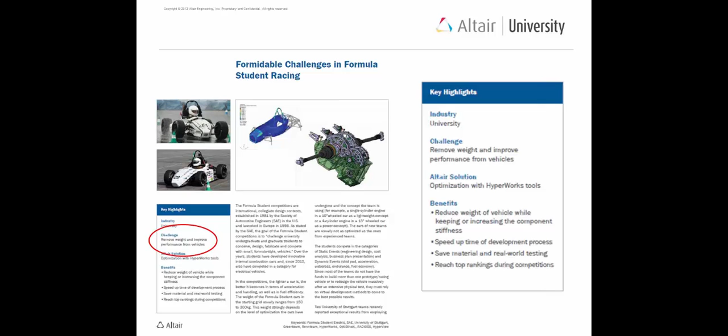Most of the teams we are talking to face certain weight issues, and we're going to show you later in this webinar solutions for how you can not only speed up your design process, but deliver at the very end a product which is more innovative and uses less material. So essentially we talk about topology optimization.

Another case study is from a solar team from the University of Michigan. I guess you're familiar with this team. It's also about using optimization with our finite element solver, OptiStruct, to minimize the weight of the composite structures. That's another topic which is, of course, very important.

Just thinking about the monocoque structures which are widely used in Formula Student race cars. So to give you an idea, I'd like to challenge you a little bit with this little, let's say, design project. It's rather simple, but it's very illustrative about the things we're going to show you later on.

And by the way, this is not a marketing webinar. We are really going to talk about technique and technology in here.

So just think about this little challenge over here. The yellow area is what we call the design space. That's the area where you can change the geometry. The task is to determine a solution which uses as little material as possible. At the tip over here, I hope you can see my pointer, there's a force applied in the vertical direction with the same magnitude upwards and downwards. You can apply certain constraints over here if you want to.

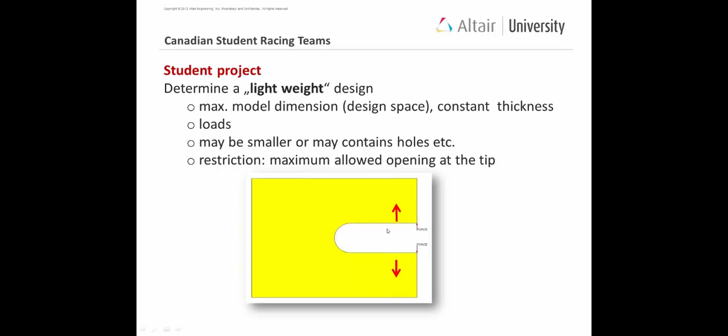If the results over here tell you no, displacements, for instance, are much too high, you need to go back and you have to restart over here, changing the CAD geometry. Most of the time, the overall shape of the geometry remains pretty much the same, but you tweak around a little bit over here and over there, and then actually hope that the next iterative process over here is more successful. The problem is simply that you need to question yourself, how efficient is this approach at all?

You don't know how many loops you need. Maybe if you're extremely lucky, you just need one run and you are done. But then the question still remains, can we do it any better? I mean, how good is your solution over here? Is your competitor, meaning the other team, maybe doing better, ending up with a more innovative solution? And there are, of course, as part of this process, a lot of uncertainties. How long will it take you really to get from here till the very end, to end with a product which you're going to use in your race car? And again, what about the quality and the performance of the component? Even though this is already, let's say, simulation driven in here, there are a lot of uncertainties.

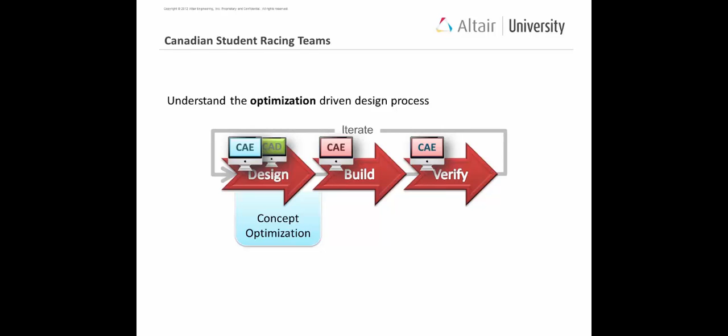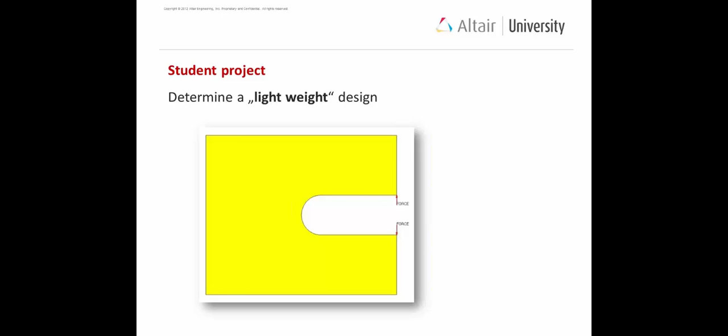As a kind of average number, most of the teams report weight savings in the order of 20%. Of course, it always depends how good the starting geometry, their old geometry was. But roughly 20%, sometimes 20% plus is the result. So this is the geometry we started with. And if you look now at the concept design solution, it would look like this, for instance.

What you can see over here is actually the geometry which was reinterpreted by students, and they put the whole thing into the finite element program, which is called OptiStruct. Of course, you can claim in here certain modeling mistakes, but this leads us to a different story. For instance, here, the meshing most likely is not really appropriate, just one element over the thickness. But this is, as I mentioned, a different story.

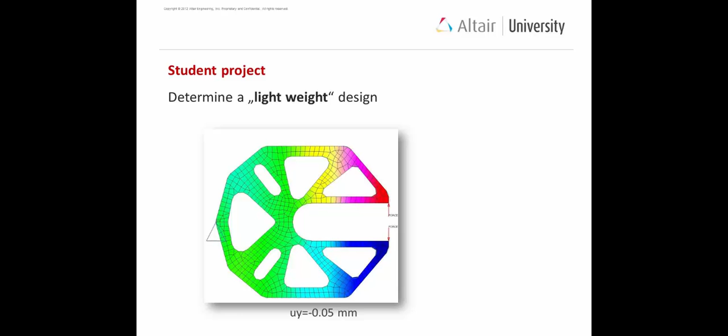The point simply is that starting with the yellow design area, ending over here with this geometry, which is really, let's say, lightweight, is something which typically takes one iteration, and you are almost done. So that's a pretty, let's say, efficient approach. And this again illustrates the same process.

You start with a rather, let's say, sketchy or bulky component or structure over here. You don't think about the details a lot at that point, because the details will be introduced by the optimization algorithm later on. That's what I mentioned with the bulky design space. You apply your loads, the materials, etc., and you go through this process. You may apply what is called shape controls. Shape controls simply means you want to have certain symmetries in your final design.

The optimization tool then pops out with this kind of concept design, which still needs certain refinement and interpretation, because sometimes the thickness of the ribs are, let's say, not continuous. Sometimes they get a little bit thinner, they taper out. Sometimes you don't like this kind of geometry. So there's still some open area for you to improve the geometry. But again, this way from the first slide down over here is typically done within a few iterations, much faster than the, let's say, traditional CAE process.

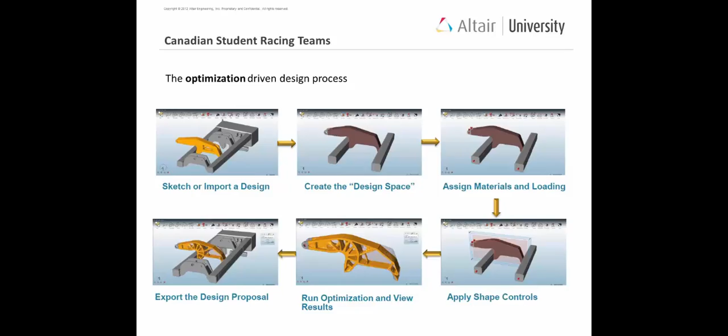And in fact, this slide brings me to Manuel Ramsaier. Manuel Ramsaier, I go back to our agenda. He is a former Formula Student member here in Germany, and he is now going to present you some of the work he did in the past. So, Manuel, I'm now making you presenter.

All right, I hope everyone can hear me. Yeah. And I hope everyone can see me now, or at least my screen. Not yet? No. Okay, now I see a screen.

Now, okay. So I'm happy to present you hands-on experience because I was, or I am still, a member of the Formula Student team, and I went through the process with Altair together, and I can share those experiences with you, which might be of worth for you. So first of all, who is this guy talking to you? I'm born 30th of July 1989, I graduated recently in August, got my master's degree, and I'm now working at the university as a doctoral candidate.

And my first contact with Altair was at a practical semester which I had done at Liebherr Aerospace, and at that point I did not know anything about the finite element method, and it was rather hard for me to go just from the start to evaluate the software for the company.

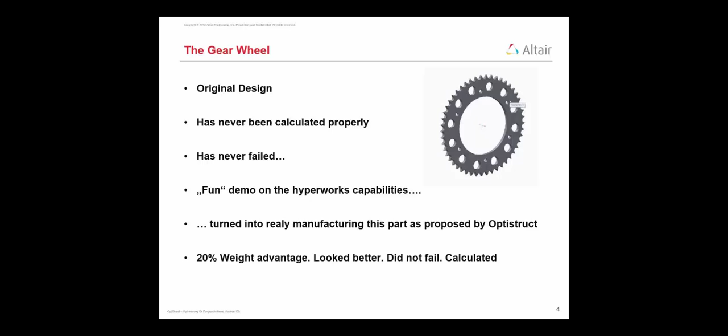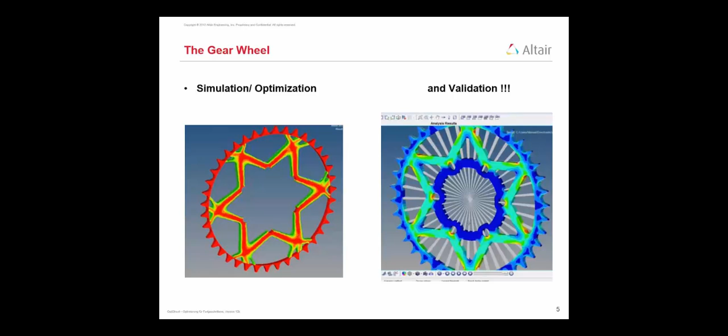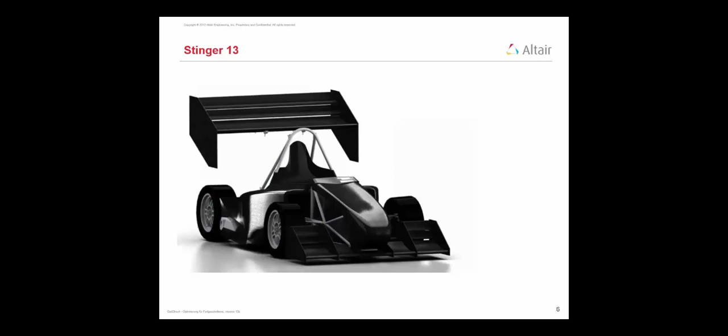Let's move on to the recommendations for studying. The support forum, which will be discussed later, is of great help. It is professional help for free, and I really can recommend it: if you have questions or a problem, go there, post your question, and you will get help rather fast. I experienced 24 hours at maximum.

And also I would recommend that you start to learn how to do simulations, if you're not already doing that, because it's a highly wanted qualification later in the industry. And another point is that you never ever trust your simulation blindly. Always double check, always make sure that the simulation is within reasonable limits. And for that point, the Altair ebooks are a help for beginners, as they describe the theory behind the finite element method very easily and straightforward.

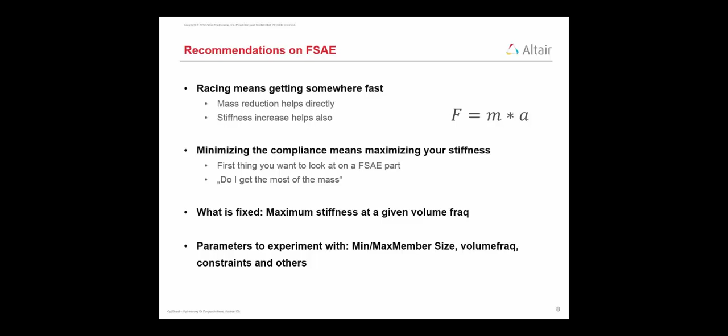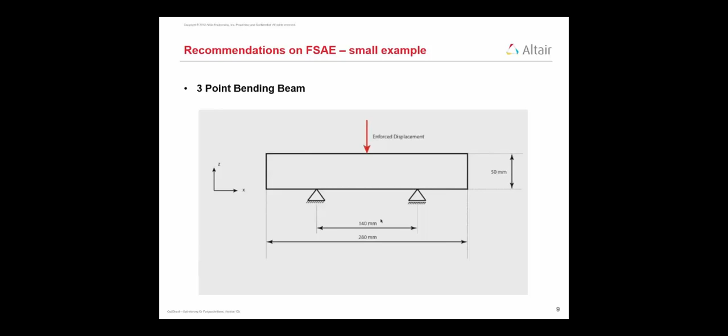As a small example, I want to present you the 3-point bending beam. It's really rather straightforward. You have two bearings, an enforced displacement, and a bending moment. First, you have to model it. So you have to decide whether you model it in 2 dimensions or 3 dimensions. You have to do the bearings. You have to give the load case. And then you're going to analyze it.

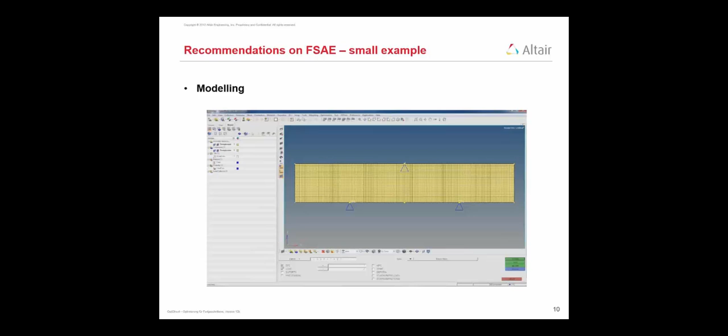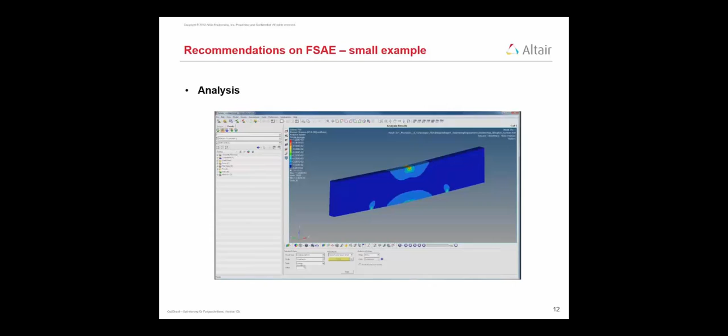In the analysis, you have the stresses, the displacements, and first check if your boundary conditions are set reasonably. When this is okay, you optimize it. And with that optimization, you get those structures we talked about earlier. From that, you go back to CAD and reanalyze it. That was in very short terms the thing you've got to do if you want to be the fastest car on the race circuit.

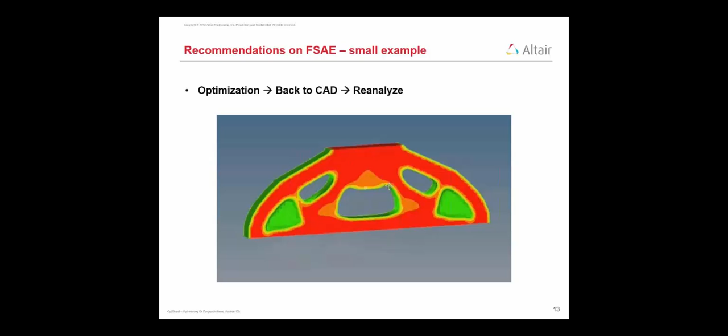So for that, I want to thank you for attending, and I picked a rather different quote: if everything seems under control, you're not going fast enough.

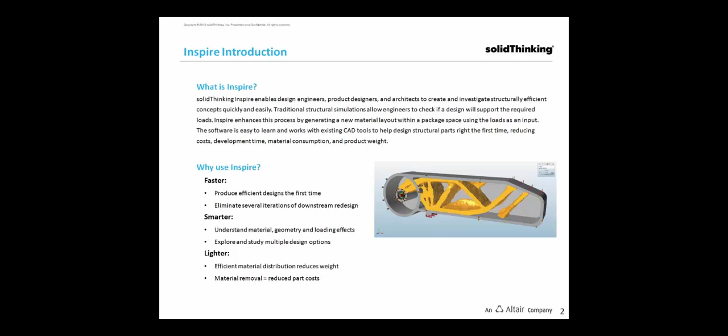The traditional design process will be to check if your design will support the required loads. But Inspire enhances this process. You give your loads as input, and then Inspire comes up with a design which is of low weight, but is still stiff enough to do what it's required to do. And I think we went over this quite a bit.

So the traditional process is you design, you build, and you validate. And this is a very expensive process, because if you have to redesign, your initial design goes to waste. And if you look at the design process we are suggesting, you start with an initial design, and then Inspire, the software, will come up with a low weight but still strong structure, and then you can redesign.

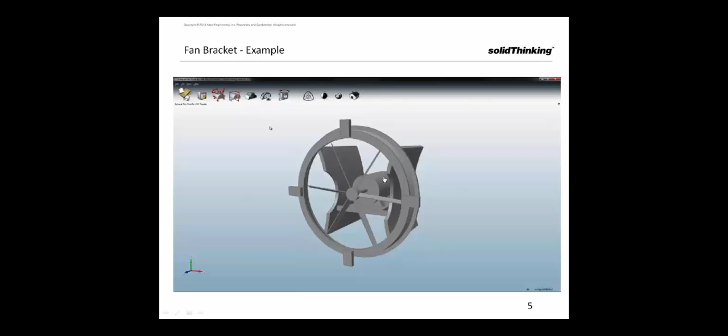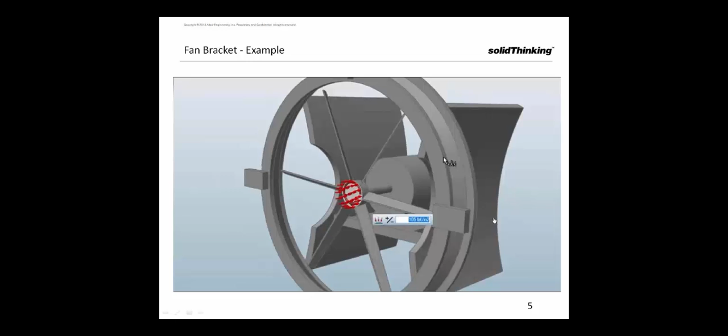So just to give you a quick idea of the design process. So with Inspire, here is a fan, and what you do is you apply the loads that the fan will experience in service, and you constrain the regions where the fan will be bolted. And then you choose the areas of the fan which you think can be redesigned and the mass can be reduced.

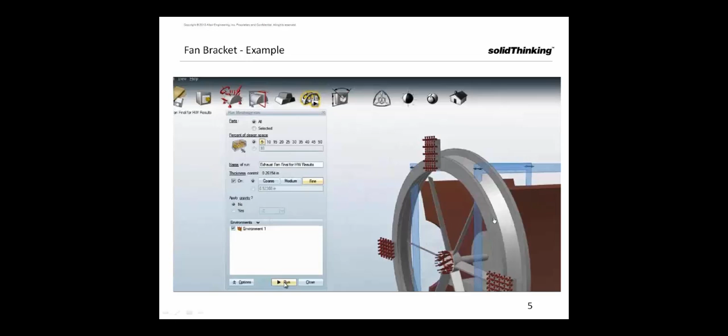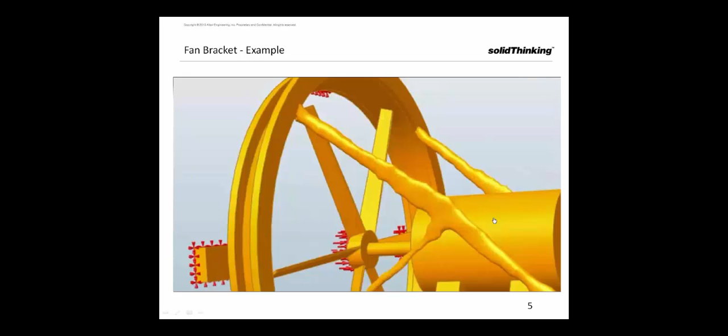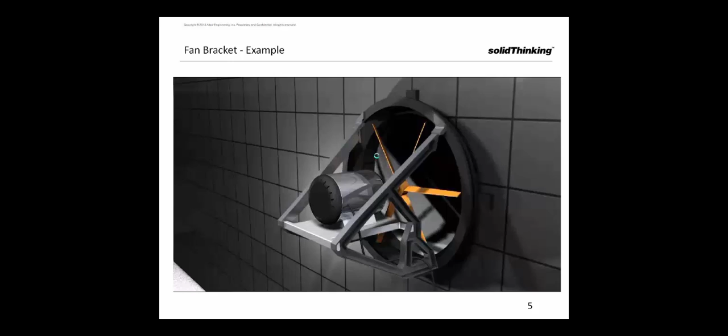And you just give such input to Inspire, and then Inspire will calculate and give you an idea of how the load is transferred within your design space, so that you can then redesign that particular component to just have the essential material within it, so that you end up with a low weight design like this. So I think I'll just go ahead and show you the tool right now.

So this is what solidThinking Inspire looks like, and as you know, initially we all start with geometry, or the tool has to know what your component looks like and its dimensions, etc. So Inspire allows you to do this in every way. You could create your CAD geometry in your CAD tool and import it into Inspire, and also you can create your geometry within Inspire.

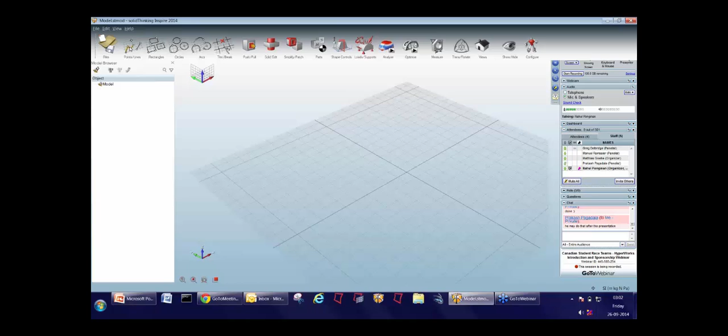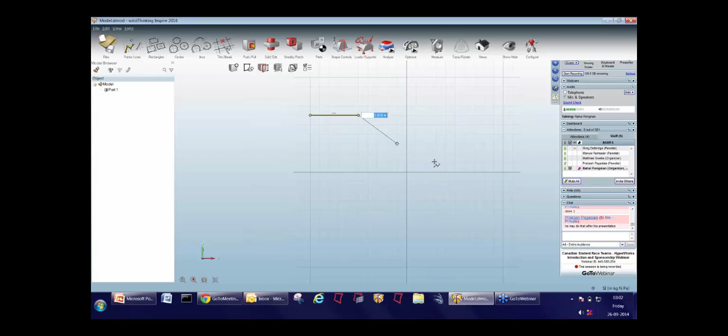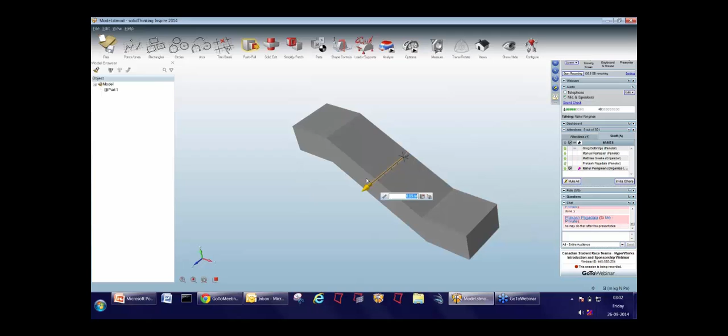So I'm just going to start by giving you a quick idea of how easy it is to create the geometry within Inspire. So we have these sketch tools here. I just click on a sketch option such as polyline here, and you immediately get a sketch plane, and you can just go ahead and sketch your geometry if you know what the cross section will look like, for example. And so it's that easy to create your 2D geometry, and you can immediately push or pull it, and you then have your solid geometry.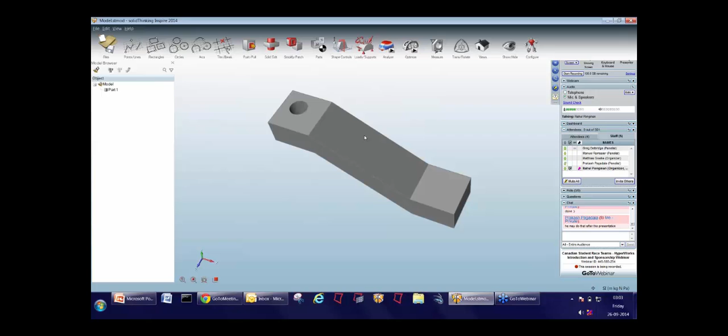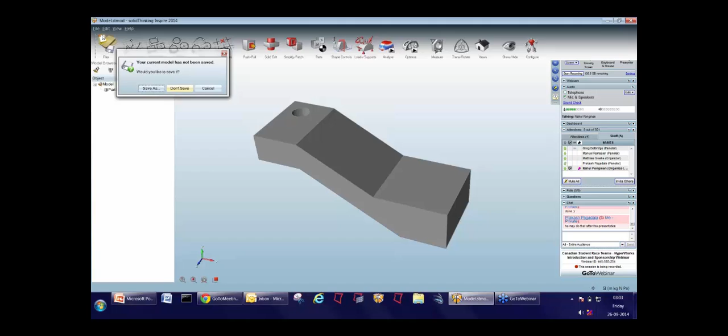So Inspire works only with solid geometry, and then it's quite easy to modify your geometry. For instance, if I need to put a hole in a region, I just do it that way, and I can modify it in any way I want, like this. So this is just to give you an idea that it is very easy to create the geometry of your component within Inspire.

But like I said, you can also import geometry from any CAD format. It supports every available CAD format, and I'm sure you recognize some of these formats here. And in this case, I've just saved it in the STMod format. This is the Inspire format. And just to give you a quick idea of how you can edit your geometry if you bring it in from CAD and do not actually create it within Inspire.

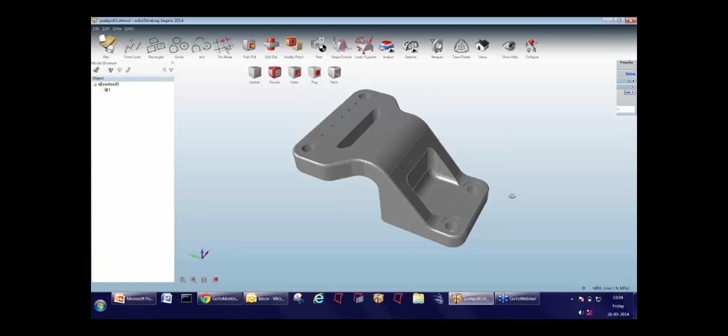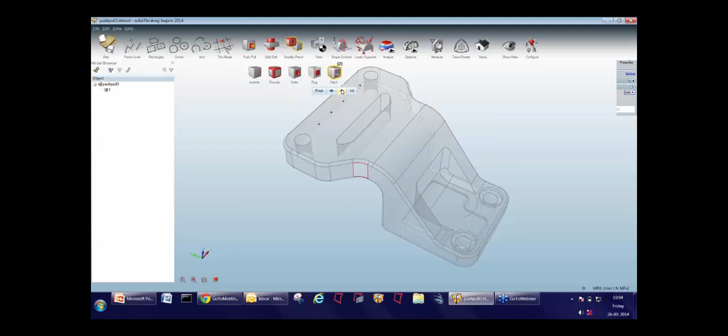So some of the problems with imported CAD geometry can be easily addressed with Inspire. For instance, I have surfaces missing, and I want to fix the surfaces so that this actually becomes a solid geometry. So I just go to the problem region that way, and I can fix it by just a left click. So Inspire will identify any of these problem places, and you can easily fix it up.

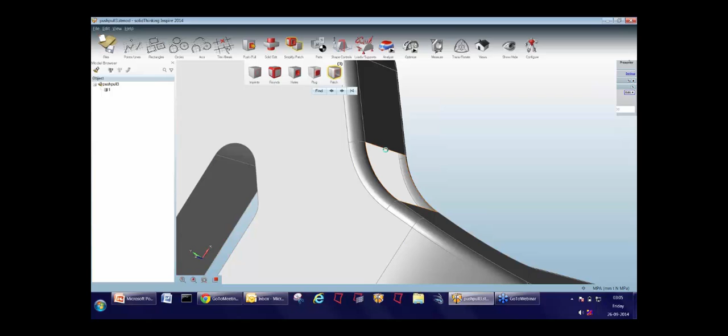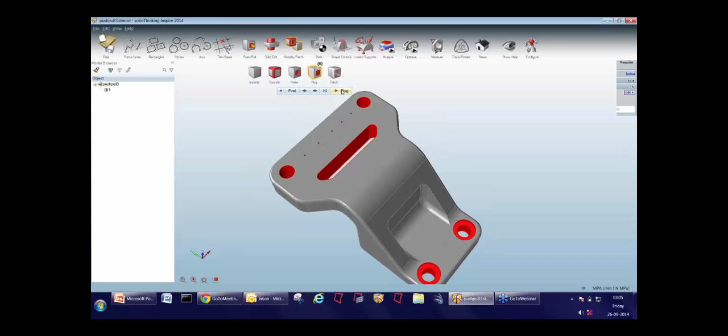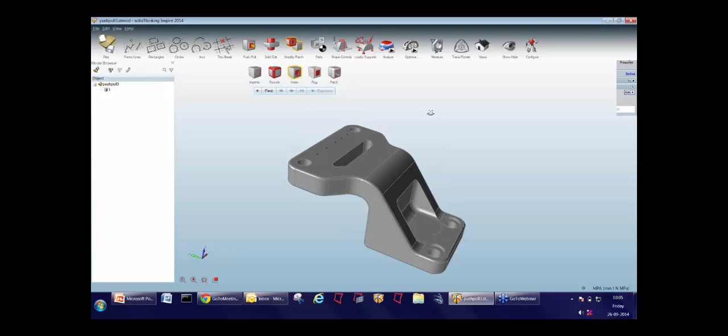And you have several options to modify your imported geometry. You can find all the holes or any empty spaces in your geometry and quickly fix it. And you can see that in this way you are actually creating different components, but you can also just fix the holes in your geometry as a part of the original component, and several other defeaturing methods like removing your fillets and so on.

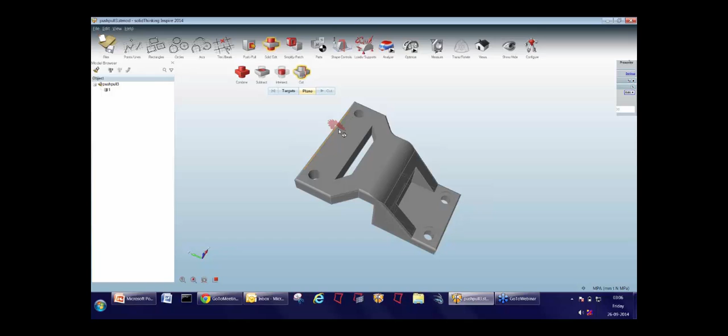So this is just a quick introduction into the several features. For instance, I can cut up my model like this and move it around. Just to give you an idea that it's very easy to modify your CAD geometry. So I would now move on to actual designing. So let's say your geometry is now ready.

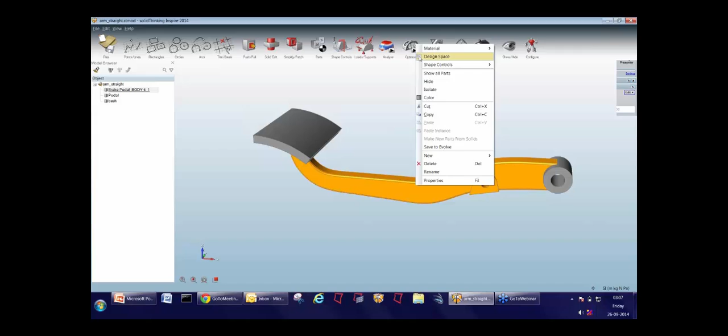So what you do with Inspire is initially you need to identify the region for Inspire that you think should be redesigned and where you need the mass to be reduced, for example. So you just right click on that particular part and you call it the design space. And you leave the rest as non-design space because this is the region where you would be applying your loads and constraints.

So this, as you can see, is a brake pedal, and this would be experiencing a load of about 500 newtons, let's say, and you can then constrain your part like this, and you're basically saying the part is held here and it doesn't move.

So what you do now is you can then enter your optimization parameters. So you can say I want to retain 50% of the mass of this component, and Inspire can remove half of the material away while it is maximizing stiffness.

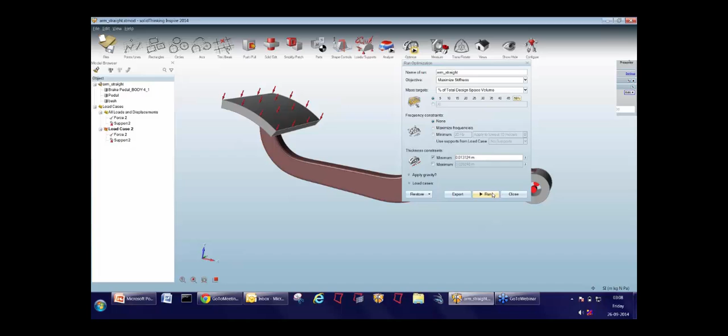And you have several other options which you might need when you're designing. For instance, if you want to take gravity loads into consideration, or if you want to impose frequency constraints, for example. But I'm just going to skip those, and I'm just going to run this optimization analysis, and all I wanted to do is remove 50% of the mass, or close to 50% of the mass, while keeping it still strong enough to do its job.

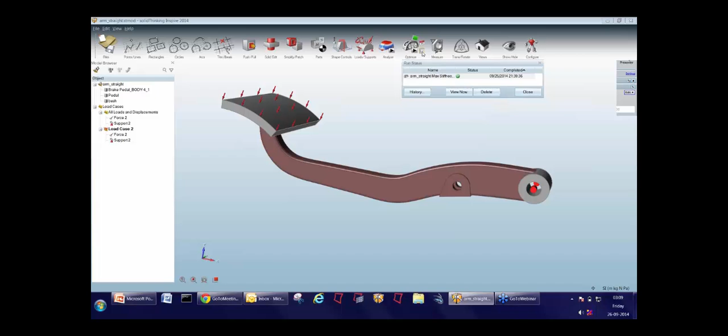So as you can see, I just clicked run, and hopefully we should have our results within a minute. If you're curious, you can just find out how far the optimization run has gone already. So once Inspire has calculated its result, it's basically telling us that we can remove mass in these areas, and therefore we have a lighter design which still does the job it's supposed to do.

What we would always like to do once we have a redesigned component is to check if this new design will actually perform as expected, and that's possible with Inspire. So I just click Analyze here, and then Inspire will basically do a linear static analysis, and this will then tell us if the design is going to perform as expected.

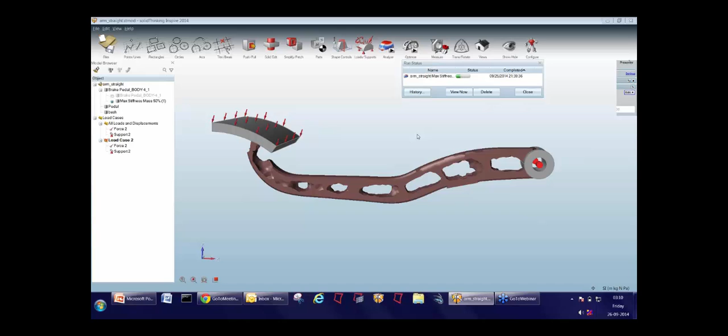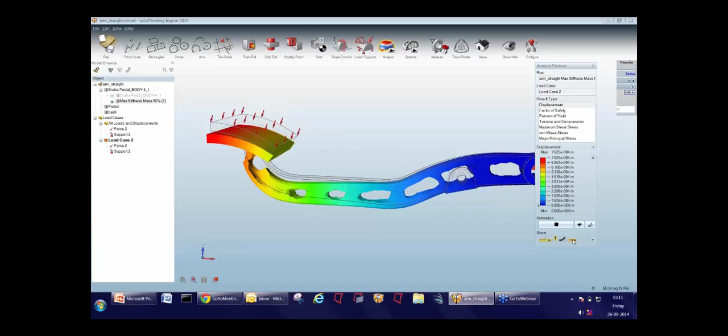So since this is a linear static analysis, you can look at results like displacement and von Mises stress. So I'm just going to check the results of the linear static analysis. So this tells us where the max displacement is, and if it is acceptable, and if it was better than the original design. Incidentally, you could run the analysis on your original design as well. So it's not just on the optimized shape that you can run the linear static analysis and view the results. So you could also animate your results and do everything necessary to post-process your analysis.

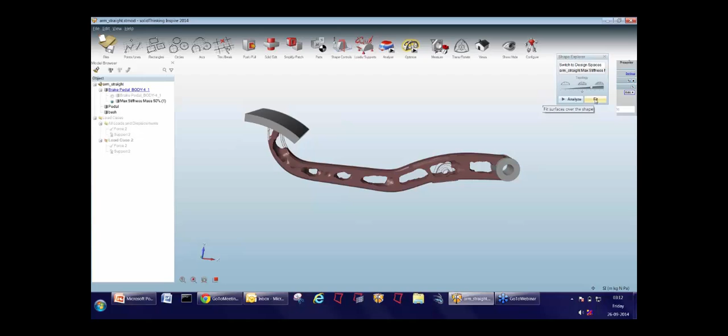So the other thing we would like to do once we have redesigned our component is maybe go to a CAD tool to actually redraw the component. Maybe you want to make it aesthetically better or manufacturable or any other considerations besides the structural considerations. So at this point you can ask Inspire to create a geometry out of the optimized shape. What we call this is fitting, and so we basically create a smooth geometry over the optimized shape suggested by Inspire.

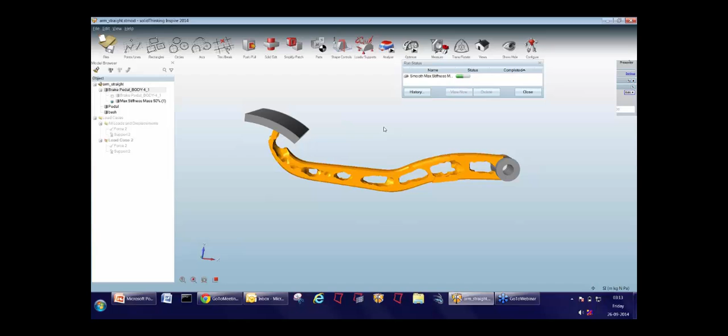So what we're looking at now is actually geometry, and you can then save this geometry in any format you wish, so that you can take it into your CAD tool and redesign it. These are the formats available to save it. And I think these general formats will allow you to take your low weight, high performing design into your CAD tool.

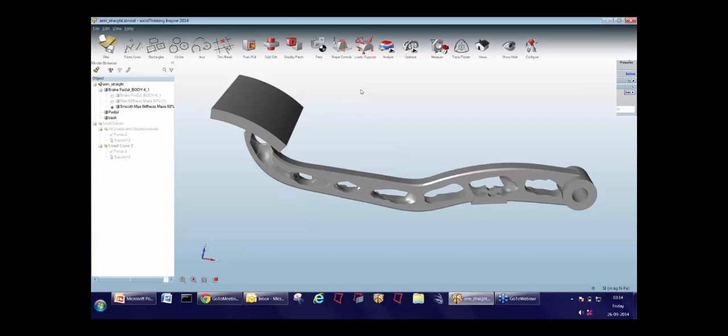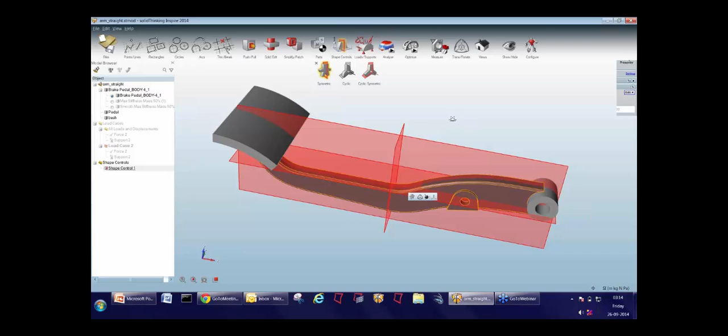So that is actually a very quick introduction into how you can use Inspire to redesign the parts of your car to reduce mass. But you might have other considerations such as manufacturability, and you can use certain other features of Inspire. So if we go to the original design, just before you run your optimization, you can ask Inspire for a design that would be symmetric along a certain plane. So this would probably make it more easily manufacturable, and also depending on your manufacturing process.

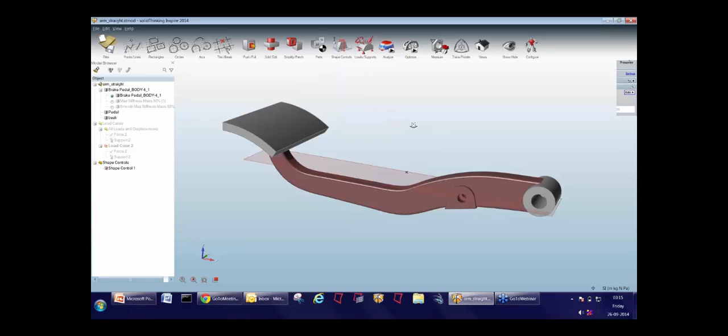So if your manufacturing process is, for example, extrusion, you would then need a constant cross section all through your design. So Inspire will then give you a design shape that will have constant cross section throughout, and there are several features like this. We're not going in detail into all of them, but you definitely have everything you need to create a part with lower weight that still performs well.

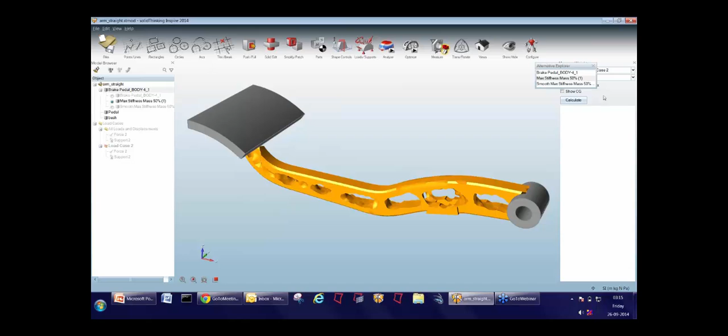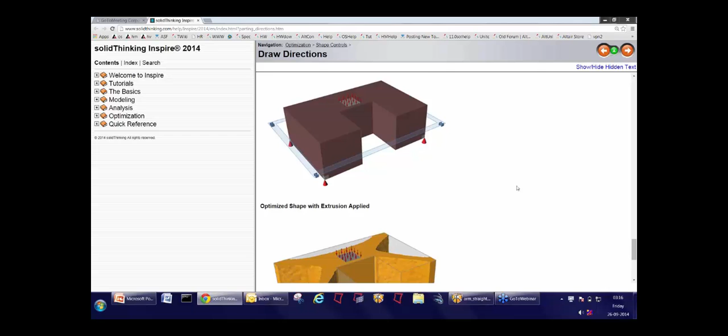So finally, I just want to quickly show you that you can see the mass of your optimized part and compare it with your initial design, and you would see that there is some reduction in mass. And also, just another quick tip if you're learning Inspire by yourself. So I just press F1 on a particular feature, and then the help will take you to that page, and you could then learn about that particular feature of Inspire. So that's a quick introduction into what Inspire can do for you.

So I'll just hand it over to Matthias. Okay. Yeah. Thank you, Rahul. Nice presentation. Just a few comments from my side.

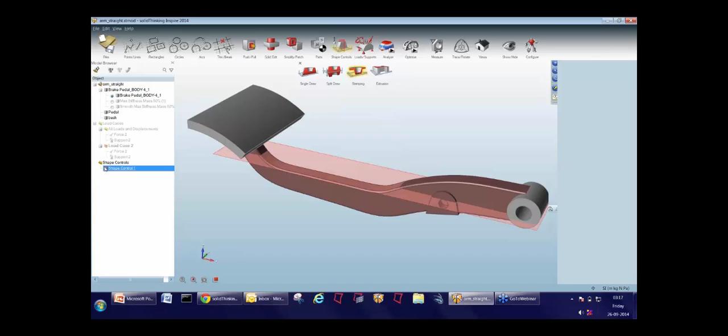You missed talking about the material properties. Maybe you can simply add a few comments on it. Yeah. Thanks. So of course, you have a material library in Inspire that you can use for your components. Just a second.

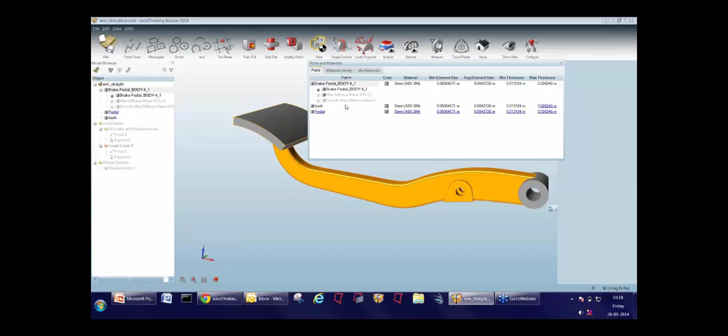So you can just right click on your component. Okay, so maybe I'll just skip the assigning part. So you would want to assign a particular material to the component. Inspire allows you to create your own materials apart from having a material library. So you can choose any material within the material library, or enter your own material values for a material that's not within the material library.

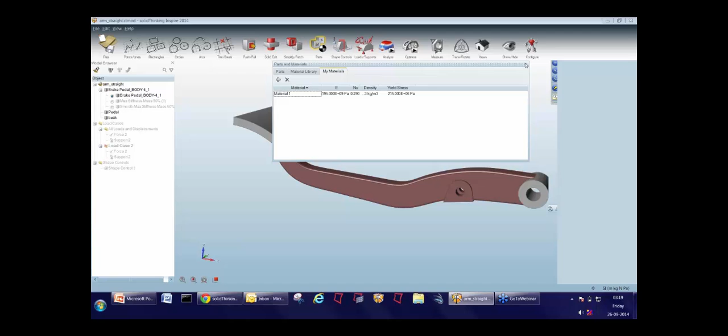Yeah. So Matthias? Yeah, I think that's really important to know, and also you can change the units which are being used inside Inspire. So if you don't like kilogram or newtons too much, there's also an option to change the settings accordingly. I think what's very important, because some of you may have wondered that certain areas of the brake pedal looked rather thin and not really smooth or nice.

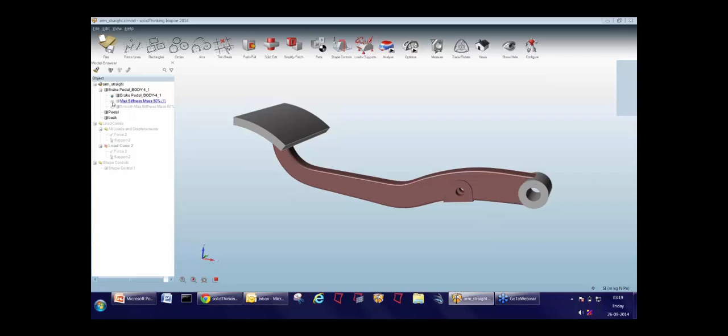Very important in the optimization process is to play around with the shape controls, with the manufacturing controls. As Rahul just pointed out, you can define the extrusion directions, you can define how thick those kind of ribs or members should be at the very end, and really by changing the draw direction or modifying the draw directions, extrusion, etc., you certainly will end up with different shapes, with different design solutions. So it's still an iterative process, but you get to the results much faster.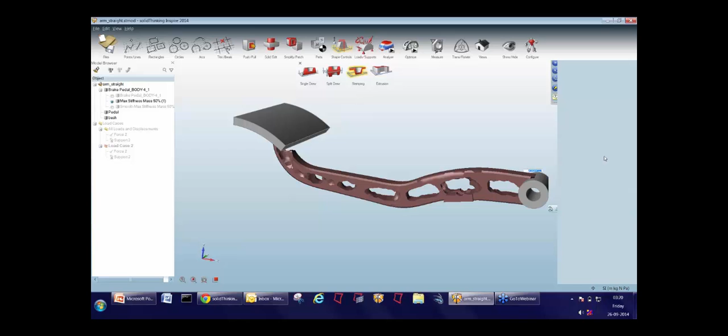And this brings me to how to get started, how to learn something about Inspire. I make myself presenter again, I show my screen, and I'm jumping into my presentation, and now it's about learning. So I'm not sure whether you know about it, but the Altair University team is hosting a dedicated website named altairuniversity.com, where you typically find a lot of helpful information about our software, about our ebooks, about the support forum, about the training center, and many other things.

So to stay informed and up to date on what's happening at Altair, what kind of events are hosted, we recommend going to Altair University frequently. We are adding a lot of posts every week. I think we end up adding something like between 5 and 10 posts, depending a little bit on what's happening inside Altair. So this is kind of a first contact place.

However, when it comes to learning, as Manuel mentioned at the beginning, please make use of our free ebooks and the support forum. But what I want to show you next is our dedicated academic training center. In the academic training center, you will find tutorials which are a little bit different than the standard training material, tutorials which are partly written by students, by our customers, and partly by the Altair University team about different topics.